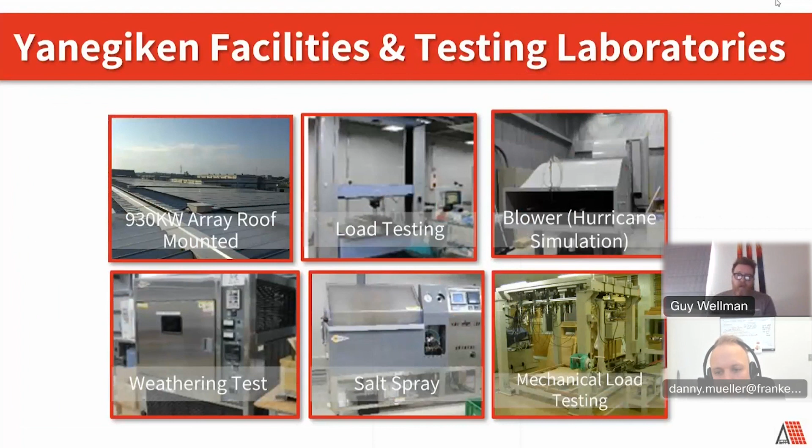We are a second generation family owned company. With Japan, what's going to make us a little bit different than most is the amount of testing that goes into our products. Before we even go to market, before we even go to third-party testing, we are testing. We've always been a big believer that we don't want to have any recalls, and we've never had any, because of the amount of testing we've done before the third party even gets a hold of it and can do their tests.

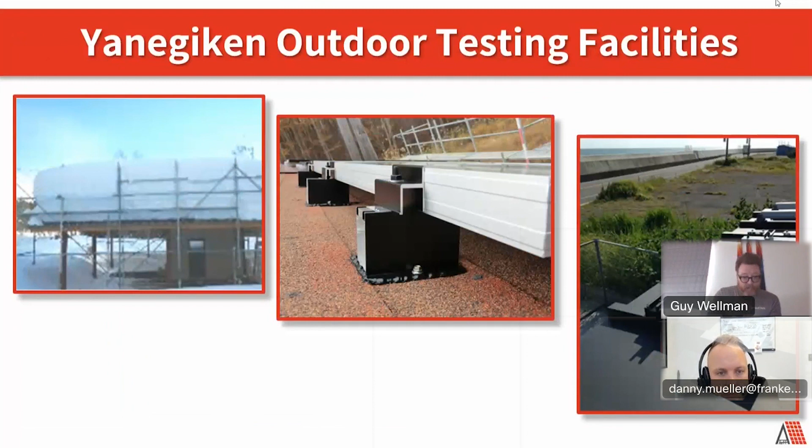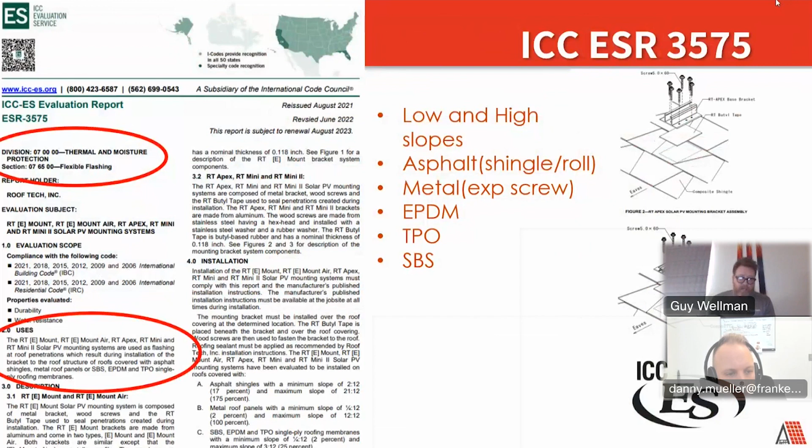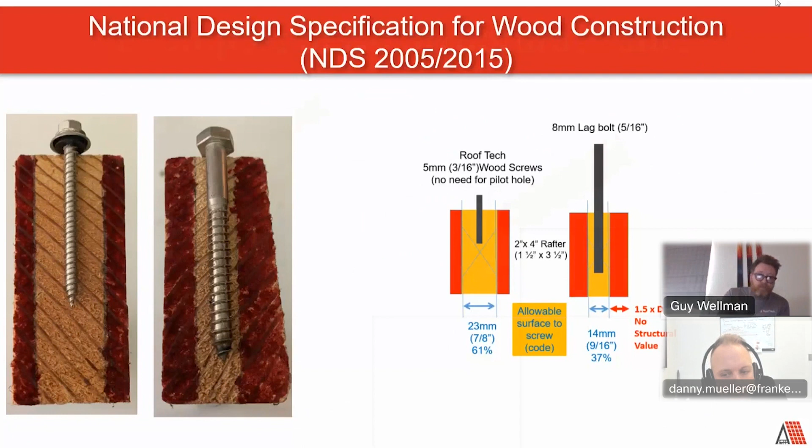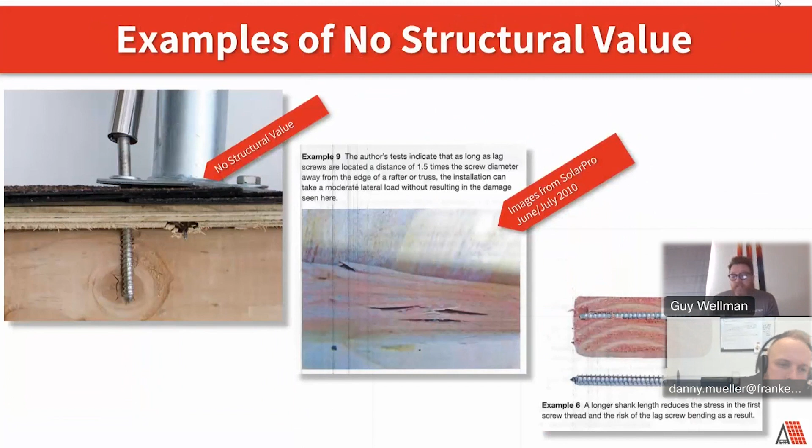Blowing out rafters. This is stuff that, when you go to sell a house and the guy comes in and he wants to look inside and he sees some of these, they're going to be red flags. These are things that you didn't know were issues until you go to sell your home, and now you've got to fix this. Or this is going to result in having leaks with doing a traditional install with solar.

On our railless, I know that a lot of you guys aren't really getting into the railless right now, but just to go through a few of the things why people are moving to the railless. A lot of the bigger national installers across North America are using a railless product now instead of a rail product, for logistics, shipping, damaged rail, bent rail. But some of the flexibility of our product is our clamps, our end clamps, our mid clamps, will handle any module from 30 millimeter to 40 millimeter.

There's leveling right on the top, 1.25 inches. It's really just going to help out the flexibility if you've got to add different modules. You come to a site, you didn't realize that there was a stink pipe, you didn't realize that there was an issue where you have to either move a module or add someplace else. This is just going to help.

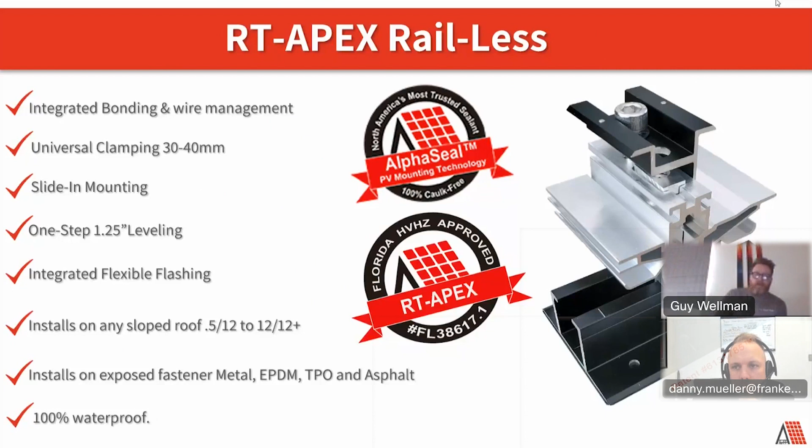And like all of our bases, we're going to be good for any kind of roof material, except no wood shake, no clay tile, and no PVC. The PVC is just because it's not compatible with our flexible flashing. The wood shake is definitely a metal traditional flashing install, and the clay tile can be used, but it's removing clay tiles and putting it on the underlayment. You guys don't really run into much of that up there.

So this quick video of doing a railless, I'm going to skip through it. This is something I can provide you guys if that is an interest down the line. I know we were going to concentrate more on the rail or the mini, but also with the railless, it is going to be different wire management. Everybody's used to tying their inverters or wiring everything up to the rail. And without a rail, there's nothing up there.

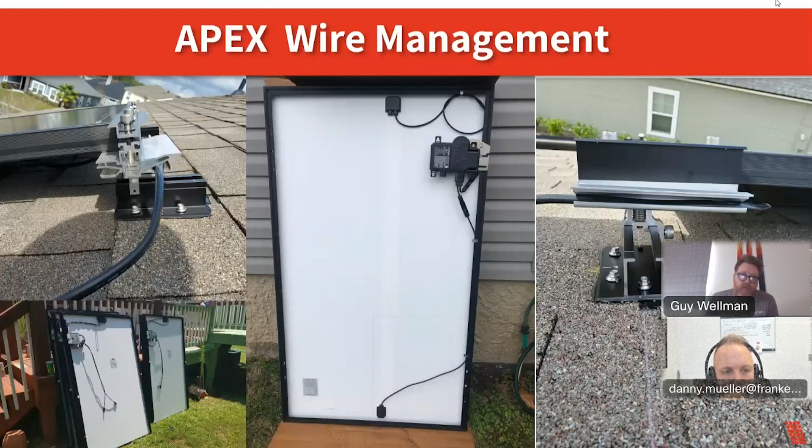So you do all your wire management on the ground, which personally I think is a little safer. You're not doing it on the roof. So you do wire management to the back of the module itself. And then our clamps actually do have troughs throughout to help out with what's left over.

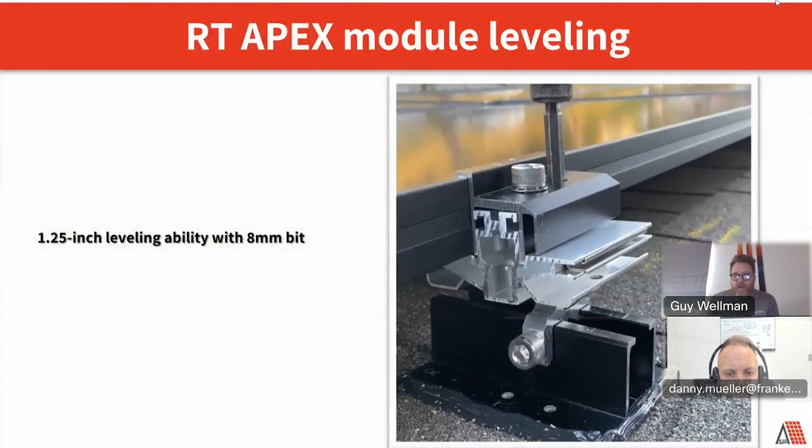Again, some of the leveling, that's going to help out with some of these wonky roofs where they're not quite level. There could be additions added on. There's ridges that run through. It's just a way to at least make that array nice and level from the ground. It looks great, and it's hiding kind of an uneven roof.

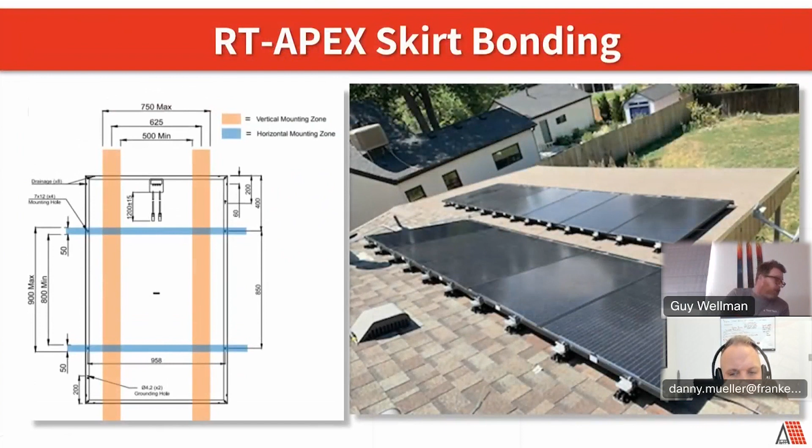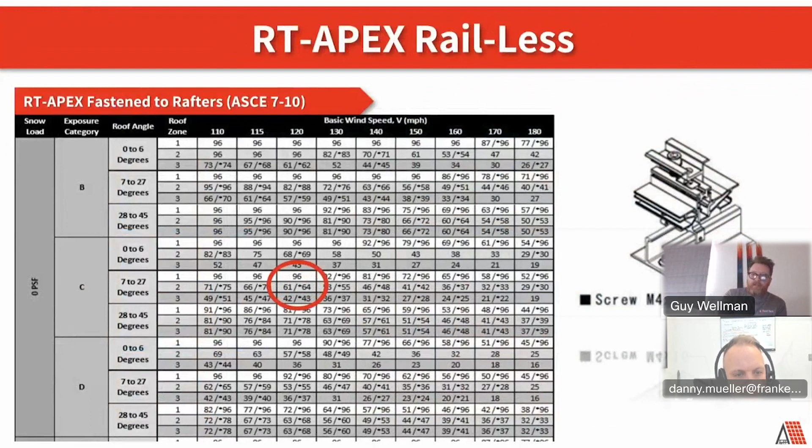We have an SDST screw, which is helping with the strength of our product. It will help expand these max spans for our railless. Helps more in the snow load area, especially in Canada.

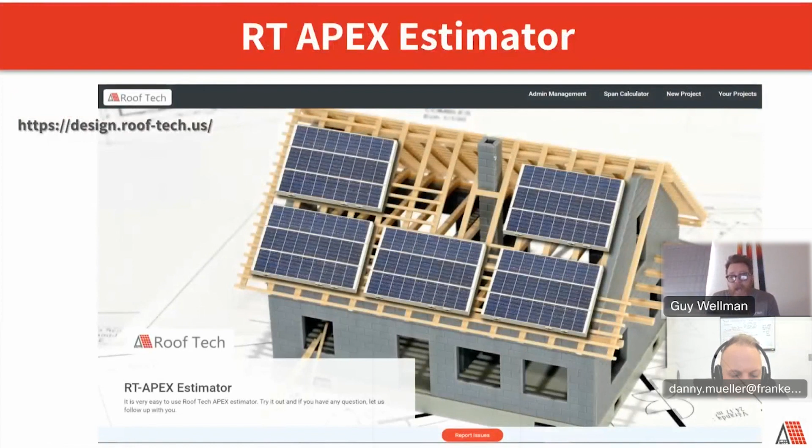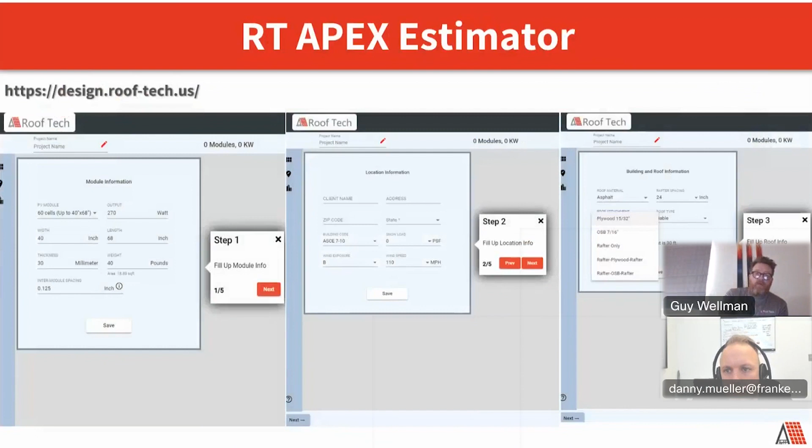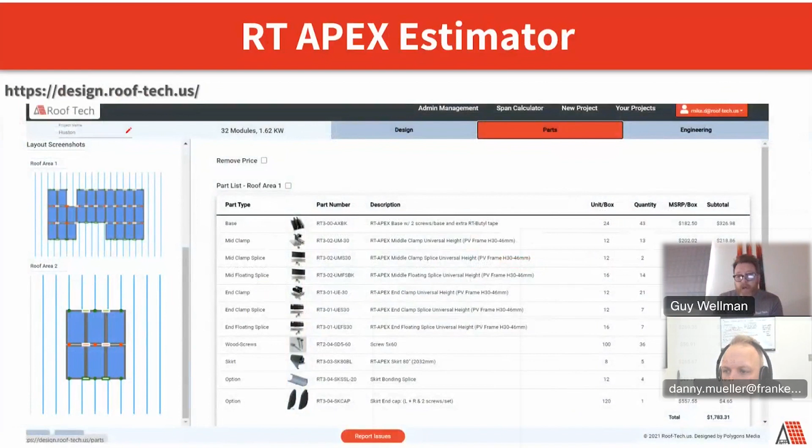And like I said, there is an estimator tool, basically drawing out the array for you and identifying what products are going to be needed for that install. Everything is drop-down menus. It's very easy to use, and it eliminates somebody having to write out their BOM by hand. It's basically putting in your criteria of the roof, pitch of roof, address, where it's located, snow and wind loads, and then it's going to pop out an engineering report, basically stating all the product that you would need from us, along with pictures or diagrams of the array. And then also your engineering report stating what your max spans and everything are going to be.

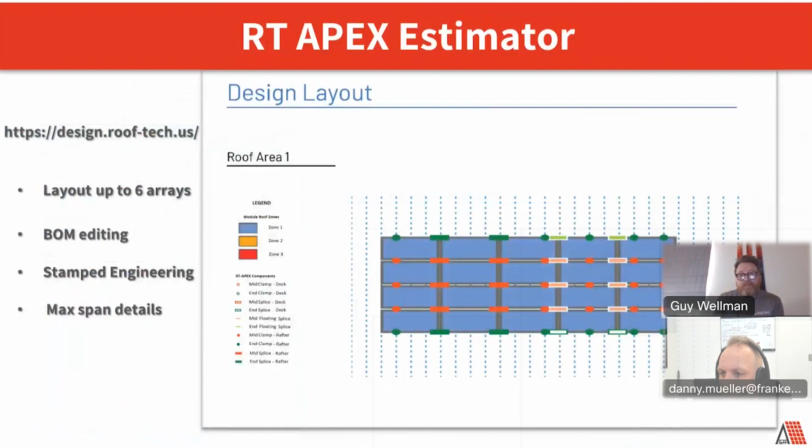Splices, the splices are going to be more for modules that are going to be able to handle that. Not all modules allow for splicing or corner clamping. People, even with our minis, will ask what our max spans are, or where our clamping zones are. Well, that comes from the module manufacturers themselves. It does not come from the racking. So same with the splices, only certain modules are going to allow for that or corner clamping, and that you have to identify through the module manufacturer.

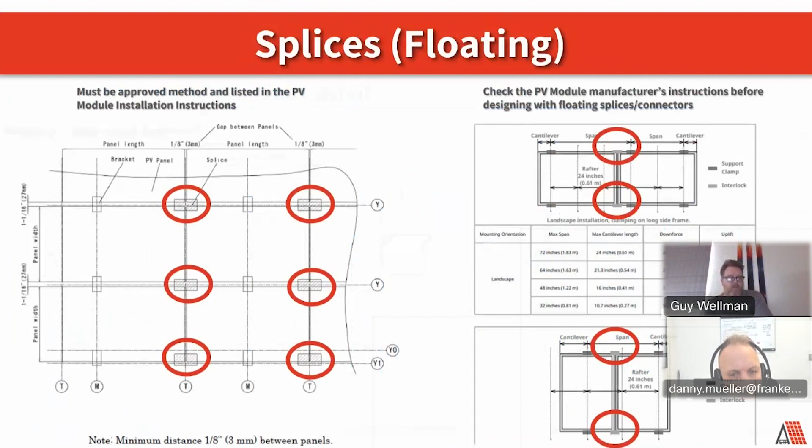So sorry, I kind of went through that a little bit quicker. I know that you guys are a little bit more interested in the minis, or have been using the minis or looking to change to the minis. So with the minis, like our railless bases, there is no pre-drilling, no pre-caulking, no post-caulking. This product is going to be a decking attachment as well as a rafter attachment. A rafter attachment is going to be 2 screws right through the middle of the base. And the decking attachment is going to be 5 screws, the 2 on either side and the top.

So zero caulking, except for on metal roofs, but I will get to that. We ask for a little bit of sealant at the top as a water diversion. This is a watertight seal with our backing. This is not a water diversion. This is not water shedding like traditional flashing. You basically peel the paper off the back of this, place it down on your shingles, put in your screws, and it is immediately watertight.

It talks about some of the temperatures that you can achieve. I need to convert this over to Celsius, but I haven't yet, but you're going to be good down to -40. You're going to be up to 180. Temperature wise, while installing it, it would be about 22 degrees, which doesn't seem like much, but it's not the end of the world. It's just like sealant. When you get into the colder temperatures, you need to keep the bases a little bit warmer. Keep them in the cab before you're going to use them.

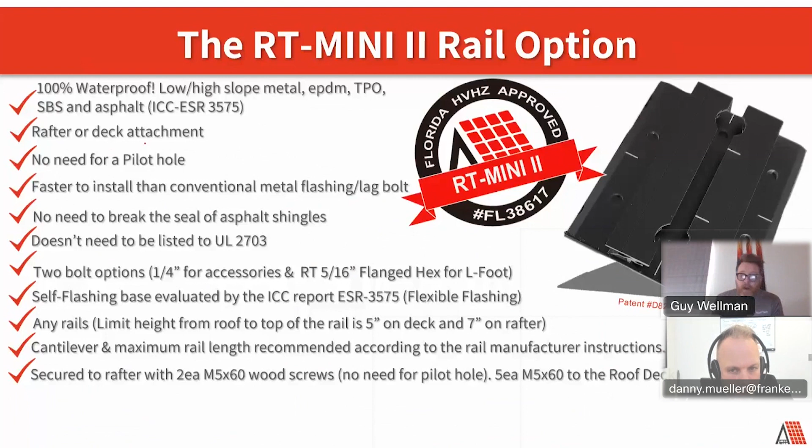So here's the product. This is just a side view here. It does show a little bit of a butyl buildup. That is something that you will see in, I believe, the next slide. Basically, anytime it's going to land on an uneven shingle course, it's not going to be just on a flat surface. You can use butyl, or you could use our extra flexible flashing, or you can also use shingles themselves. I have seen people do cutaways.

So you actually can't cut the main shingle, obviously, but the beauty tabs on shingles you can. And you can use those if you need to build them up. But we do provide extra butyl. But on the mini side, you really get to dictate where this is going to be located. On the railless side, you're kind of pigeonholed to how thick the module is, or the width or the length.

So you're kind of dictated: on the eave row, you'll have a flat surface. Your next bases that you lay down are typically going to be on uneven shingle courses. On the mini here, we don't see a lot of people having to do much butyl work. You get to really design where these bases are going to be located.

Hey, Guy. Yeah, go on. Quick question from Shamor about the temperatures. The question was if it is in Celsius. What were the temperatures again? So you are looking at -40, so -40 is going to be -40 Celsius or Fahrenheit. Correct. And then up to 178 degrees Fahrenheit, which is 81 degrees Celsius. Correct. So we're going to have you covered.

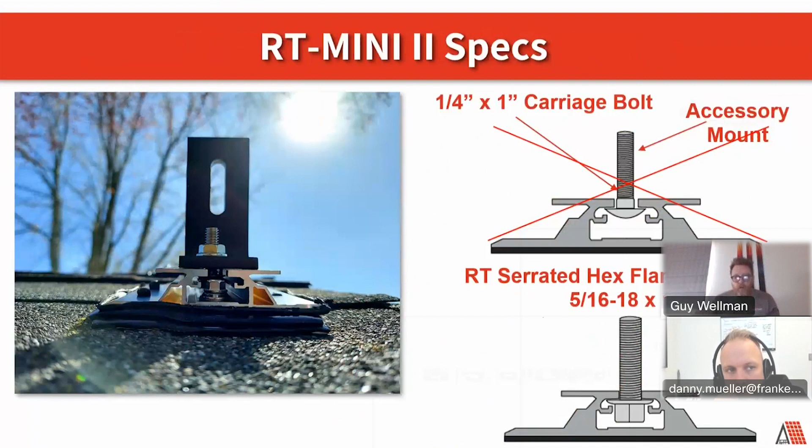It's just making sure you can go well below freezing in what you guys are going to install in those temperatures. But it just needs to be warm when you install it. So that's why I say take a heat gun on the roof. You can do a quick test. You peel the back of it, you stick it on the shingle. Does it stick? It's good to go. If it does not stick, heat it up again. You just need it to stick a little bit, and then you put your screw in, because it just needs to be malleable or rubbery or pliable when you are screwing it into that cavity. Okay, thank you.

The mini does act as a conduit mount as well. There is a self-tapper screw along the side of it. I'm sure people that have used the minis are also using it as a conduit mount. It's not a necessity anymore. I talked to Danny a little bit earlier today about how we do have a new conduit mount coming out by the end of this month, and I will be providing Danny and his team at Franken some samples to hand out and see how everybody likes them.

It's a bit of an overkill when they use the mini for a conduit mount, just because of the testing that we've gone through, and it doesn't need much for a conduit mount. At the same time, it's a little expensive for a conduit mount, so that's why we have designed a new product.

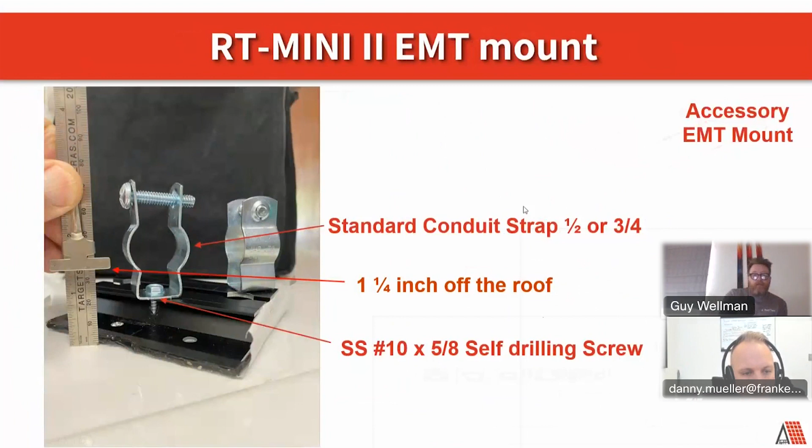And sorry, there was a follow-up question from Shamor. Yeah. The butyl tape, what temperature does it need to be when you install it? So it needs to be above 22 degrees Fahrenheit. Okay. 22 degrees Fahrenheit is -5.5 degrees Celsius. Just looked it up. But again, that's stating that's what temperature it needs to be at. Yeah. So you can achieve that by using the heat gun. Yeah. So that's why I'm saying once it gets lower than that outside, it's not the end game. It's not that you can't install it. You just need to get the flexible butyl on the back of it heated up enough so, once you put the screw through, it pulls into that void, that cavity.

Yeah. Maybe store them somewhere warmer until you use them. Yeah, I actually always tell people to leave them in the truck before you use them. I've got guys that put them in their coat pocket, and then I refer to it as, they're used to using sealant on those cold days. They don't leave their sealant out, it's not just on the garage floor or on the driveway. It's staying as warm as they can keep it, so it's pliable.

So this is just a little bit more of the diagram that I was talking about before. So it's 2 screws for a rafter install, which you're going to achieve longer spans or bigger spans going rafter, and then 5 screws. So there's basically 2 on either side here and 1 in the top. When you're doing a rafter install on the left or on the right here, where you've got the 2 screws, you just have to make sure your bolt is put in.

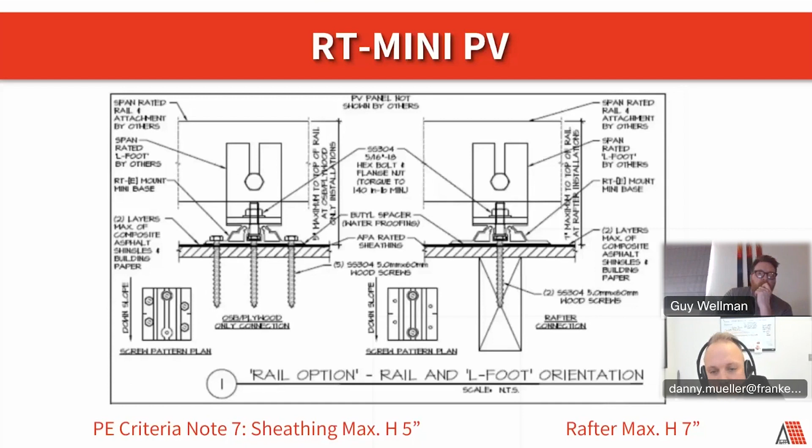This is what I was talking about. If you guys were hitting rafters, you basically have 2 or 3 options. You've got decking only, you've got rafter, you've got decking-rafter-decking, and then also what we call a hybrid attachment.

Basically you put in that first screw, and in the diagram it's not showing that there are 2 rafters next to each other - it's either side, you can just cover up one. It's showing that if you hit a rafter on the side, it's basically the same as if we hit it right down the middle, and we've done the testing for that as well.

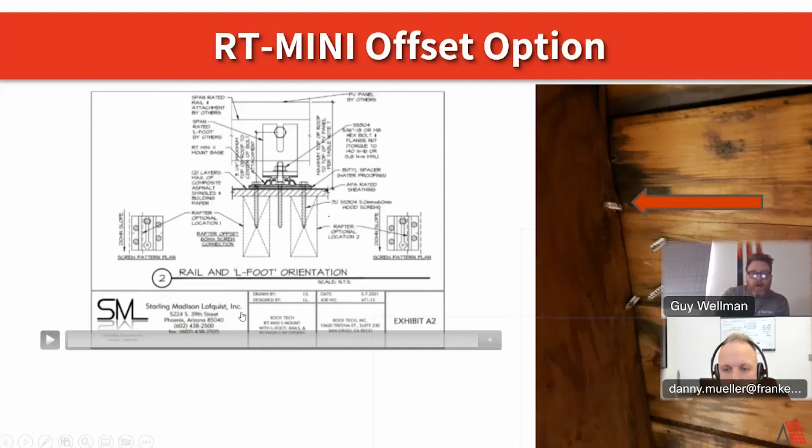Adjustability too - people have asked us in the past, when are we going to get an integrated L foot, when is it all going to be one piece? I understand it takes a little bit of time to put your L foot and the bolt together compared to if it was just an integrated L foot.

Actually, we will probably never do this. One of the reasons is because there is some play, there's flexibility here from almost bolt to bolt.

You've got about 2 inches of play to be able to bring that L foot to your rail. So if the rail is damaged, if it's mismeasured and put down improperly, you're not bending the rail to meet your L foot anymore - you're bringing your L foot to the rail.

By bending this or trying to force it to an integrated L foot, you're really putting undue stress on that roof. Over time, over the course of a year, maybe 2 years, you're going to see loose bolts because it was putting so much stress on it.

And then with the expansion and contraction, wind - you rattle those nuts and bolts around, things are going to be loose. If you look at anybody's manual, it'll say you should be going back after year 1 to tighten up nuts and bolts. I know most people don't do that, but that's what they state.

So with us being able to move to that rail, that's going to at least alleviate some of that pressure and you'll probably be less likely to have loose nuts and bolts when you go back, if you went back.

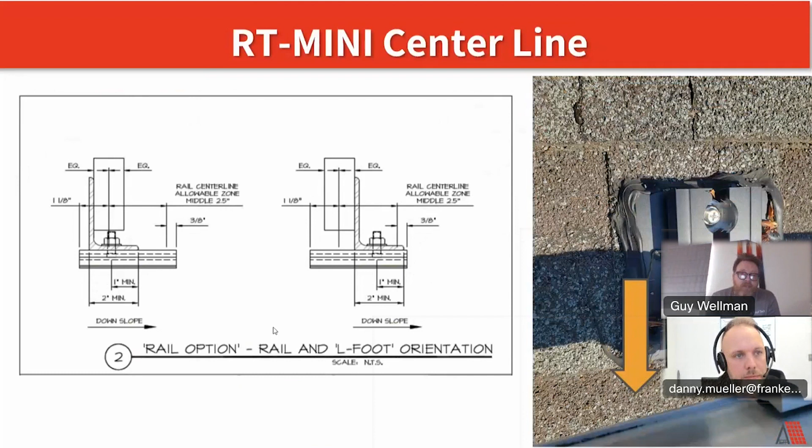One of the benefits of your product is that it's agnostic, right? So if you have an integrated L foot, maybe it doesn't work exactly with some of the racking, some of the rail.

For the longest time we weren't in IronRidge's manual, and a couple other manuals, because they just didn't think this was a viable option. We are now in the manuals.

But every one of these companies are going to have just a standard L foot. Of course, they're also going to produce L feet specific to their traditional flashing, but at the same time they're always going to carry just a generic L foot. So really it's a way for you guys to keep doing what you're doing, keeping your L foot, keeping your rail, and just having a quicker install process because of the flashing - no longer needing to find the rafters, no more pilot holes, no more pre-caulking, no more post-caulking. It's just going to be a lot easier.

Schletter has even stopped producing any sort of flashing themselves because our product is in their drawings. So it's something we've worked with them to integrate into all their drawings and pre-stamped drawings for building permits, etc. So yeah, they're very happy with the product as well.

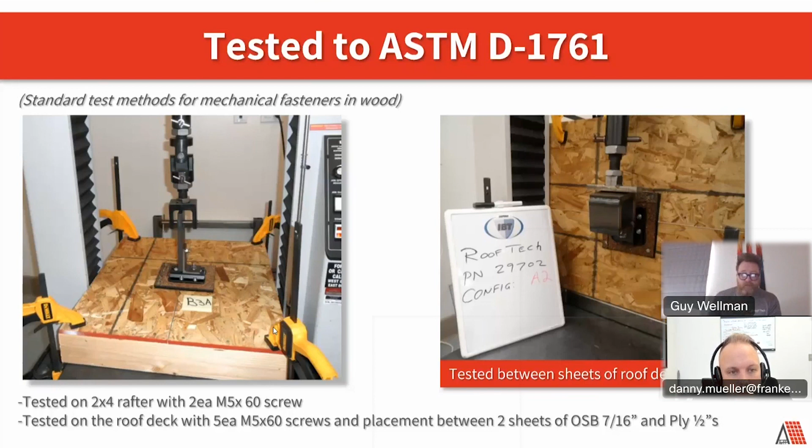Our max span calculator that we have online is something that can be worked on the fly. Let's say you were going rafter to rafter and then missed a rafter - you can calculate it right away on your phone to figure out what your next span should be. If they were up on a roof and didn't have this already, they can work it on their phone. But more times than not, your installers are going to know what their max spans are before they even get there.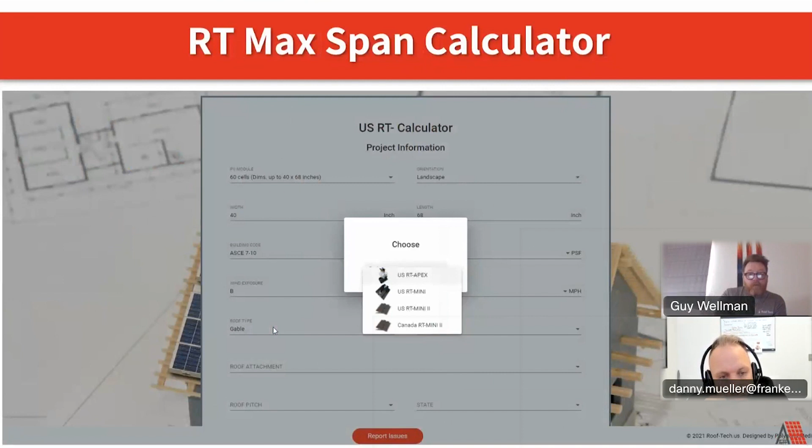Now you run into people stating, hey, I come and fix jobs all the time where people are putting butyl on the back of an L foot and attaching it to the roof. Well, it's not our butyl - our butyl is specific to ours, it is proprietary to us. It's our patented butyl, that's why we changed it to something like an AlphaSeal technology.

It's not meaning that outside of the 45 we can't do it, it just needs separate engineering. We didn't do any kind of testing or engineering past 45. So we have been installed on those very steep church roofs, and it's been fine - it just needs a third-party engineer coming in and okaying it.

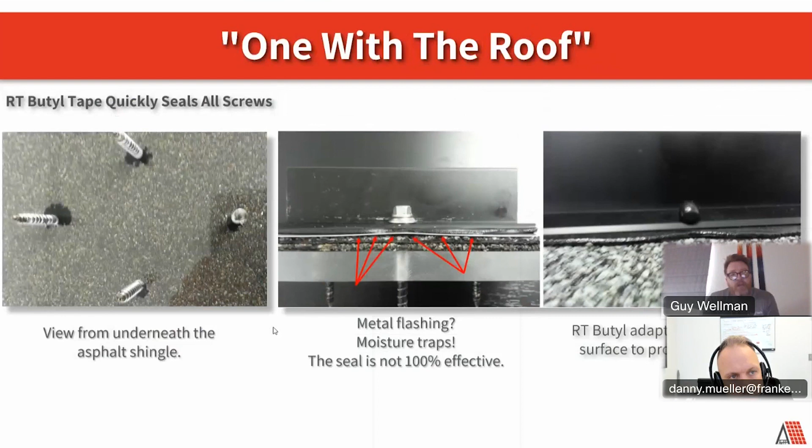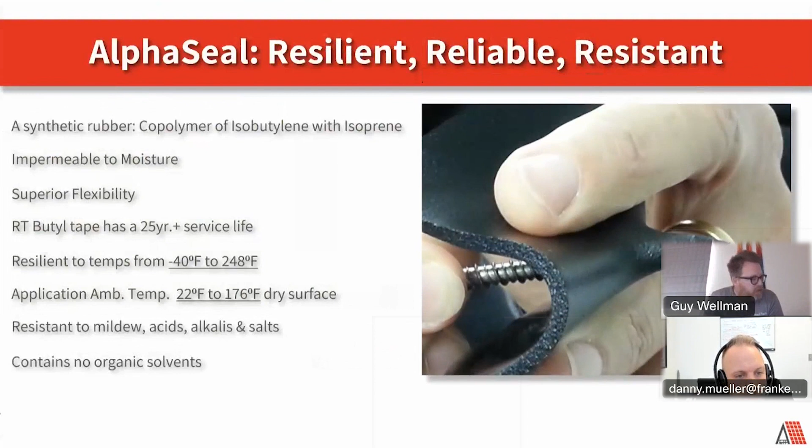So here are these temperatures that I was talking about, and I can send these out, but for whatever reason I just have not converted it to Celsius, and I need to do that. But this is what is sealing everything up.

This is what is making it waterproof. And like I said, we've done the fully submerged tests. We've also done at shows where we install this in water. We fill a piece of a roof with water, install it, then back out the screw completely, and there you can see a drip.

You put it back in, and it seals it right back up. So the temperatures are, like I said, -40 to 248, not 176, but the app temperature, the temperature it needs to be installed at, is 22 degrees to 176. So the 22 degrees, that's about -5.5.

I've been on jobs where it's well below freezing and we're installing it, but it's a sunny day, it's a nice day, the roofs are dry, and it just takes heating up the back of our bases a little bit, just making them warm enough to install. Then once it's installed, it can instantly get cold again. It just needs to be pliable.

Like you should see the screw poking through the butyl right now. It needs to be like that just for when it installs, as it enters the sheathing or whatever surface structure you're installing on.

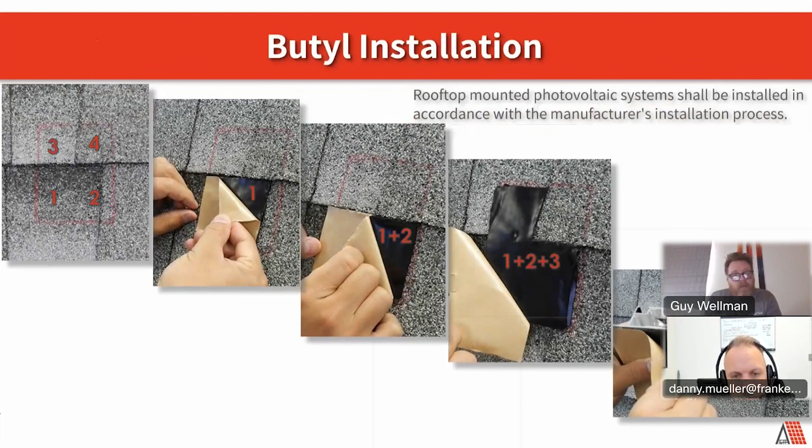And again, like I was mentioning, you can cut away butyl tabs. You cannot cut away, obviously, the main shingle, but the butyl tabs that are on that main shingle, you can. You can also use shingles as a viable option if you did not have butyl.

There's a quick question from Andrew: have you guys done any testing with the lateral loading of the RT Mini, hypothetically if it were used as a safety anchoring position? So we have, we actually talked about it a little bit last year or maybe the year before, and it's just the loads that are needed for a fall. It cannot be an option, because we had guys stating before, 'We're using your minis to attach our harnesses and our fall gear.'

And so we thought, oh man, that'd be pretty interesting, maybe this would be a viable option. And we came back and it was like, yeah, there's no way. The amount of force that is needed - not saying it wouldn't work, it's just saying the amount of force that is needed to sign off on it - we're nowhere near that.

I'm sure from a liability standpoint there would be issues. I mean, it was a great option, to put something up like that and to be able to hook onto it nice and easy. We got all excited as soon as we heard this was going to be a possibility, and then our engineer got back to us and said, absolutely not.

And then Jamor had another question about how dry is dry - are we expecting perfectly dry, or is a little dampness okay? So yes, a little dampness is okay, but obviously you don't want to trap any kind of moisture inside of our flashing.

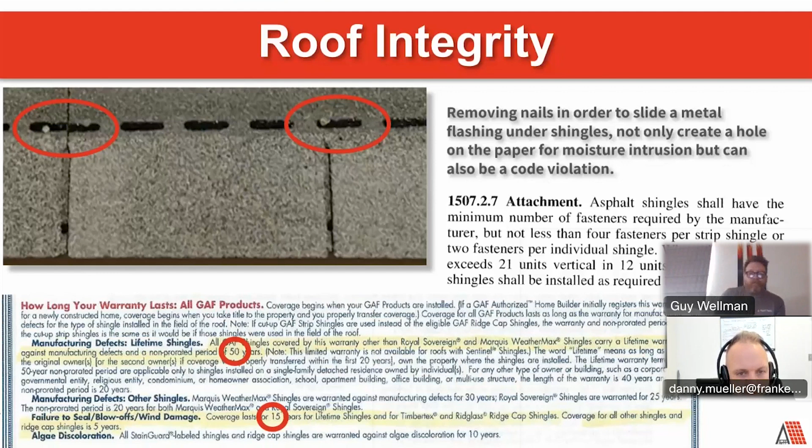We actually used to require 3 sides of sealant for UV protectant, and it was not for anything other than UV protectant. That is now just an option, so there is 0 sealant required.

So with 50 million penetrations worldwide with 0 leaks in North America and worldwide, it is not a new product. People will kind of scoff at those numbers, but obviously it's every penetration. I would like the numbers to be even higher, I wish we had more holes.

It was just to show that if you are installing this product properly, and that will come with training and advice from us. It's more so the training is going to be for the railless side. The minis virtually require no training. I can show somebody how to install a mini in a matter of minutes and have confidence that they are not going to cause a leak or any issues to that install.

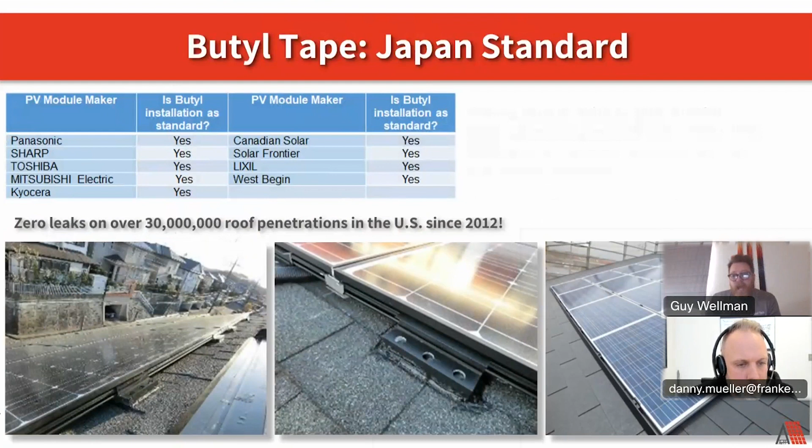We tell people, if you put down a mini and you put it down in the wrong place, don't move it, leave it there. I would leave it there. It's already sealed up, and the array more times than not is going to cover that missed mini.

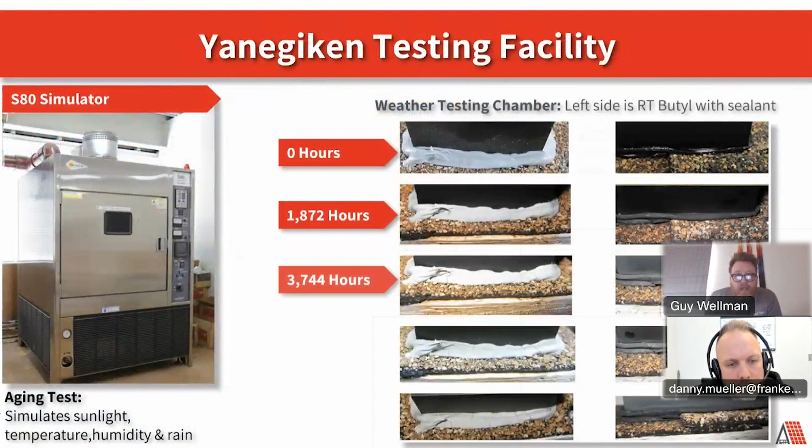More testing. This was our carbon arc test, basically simulating multiple years of humidity, heat, rain, everything. You can see what it does to just standard caulk - it starts off pliable. Ours, on the other hand, will be pliable throughout that whole process.

I've gone to jobs where they're doing a re-roof, and our second generation Apex or second generation railless was installed. We have to pull up all the bases because they think they're going to reuse them - there's a stipulation, that was one of the frequently asked questions, can I use these bases again? You can use these again, up to 2 times. So you can use it the first time originally, and then you can do it again for a retrofit.

The problem is getting the butyl off the back of the bases - it's going to be very difficult. I've had people wanting to save money so much that they stick all their bases, whether it's minis or railless, into the freezer to get the butyl as hard as possible so they can chip away and then put a new piece of butyl onto the back. It sometimes doesn't make sense, but it's just to show that it's still pliable years down the line. It's still rubbery, still doing its job.

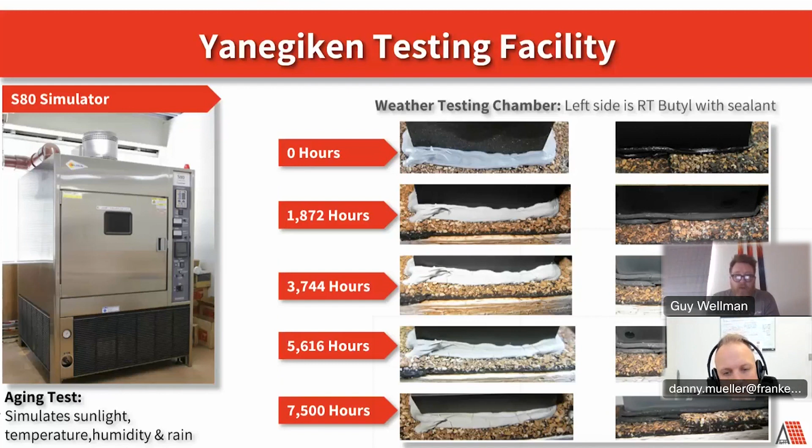Some more pictures here, basically just showing when you are pulling this up or using butyl. You can see on that far right picture the butyl on the inside, and on the sealant, it's only got a couple spots where it's still rubbery, still pliable, still doing its job. Other times it's just cracked up - it's really not doing anything anymore, and that's when you're going to risk a leak.

You'll see that even with other products out there that require a lot of sealant, whether it's sealant underneath - the sealant underneath is probably doing the most of the work. The sealant on the bases is really going to crack up over time, and it's really not going to be providing any value, but hopefully it's going to save what's underneath. It's just that sealant is not a good option for this, and really the butyl, or our flexible seal, is something we have confidence in. That's why we offer our 25-year warranty.

We have outlived our 25-year warranty. We've talked about making it a longer warranty, but really it's kind of a moot point because roofs aren't going to last that long anyways.

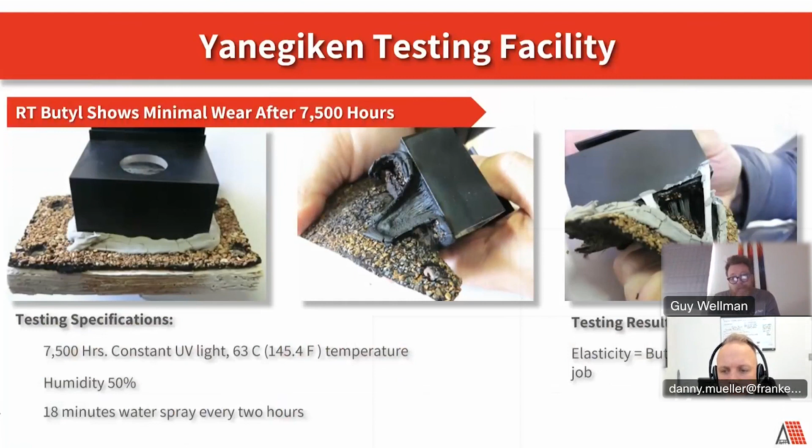There was another question, Guy. So if you reuse the RT Mini, can you just use a new butyl strip? I guess the answer to that is yes, technically. You can reuse it, but the back of it, you do need to clean off the old butyl. We do have extra butyl pads that you can order and put right on the back of them, so you could use it again. It's just once they start getting into trying to remove that, they're going to see that it is a little harder than what they think. So it's an option, and I always put it out there for people, but I have yet to see anybody do it for bigger arrays.

If you're only dealing with a handful of bases and it was a DIYer that did it themselves, then yeah, I have seen them remove the butyl, put on new butyl, and reinstall that same array onto the new roof. But we're selling these things for well below $8 each. I don't think it would be worth the time it takes to get all that sticky stuff off. You have to buy new butyl tape too, which is going to cost a couple of dollars. Probably best to just buy a new RT Mini. People want to have that option in their head of like, oh, I can reuse these, okay great. But when it comes down to them actually trying it, they're like, you know what, I'm just going to buy new minis. I think it's probably the best use of your time. Your time is not free either, right?

What about metal roofs that are... can you hear me? Yes, we can. What about metal roofs? I see the metal roof here in your picture with the profiles, looks like maybe 8 inches apart, or maybe six. What about the roofs that are corrugated and literally look just like a wave, without any flat spots at all?

Yeah, so that's not going to be a good fit. So when I say that metal roofs are good, it's kind of... you need a flat surface at the end of the day. It's like standing seam, we're not good for standing seam either. You should not penetrate a standing seam. They've got tile hooks or clamps for those, and we'll tell you that. For these too, yes, we can be installed on certain metal roofs, and we have that capability. But once you send a picture or you ask us, we'll steer you in the right direction.

We're going to say no, it's not a good fit. Yeah, you can contact us too. We've got a large variety of different products that may work. Schletter has a bunch of products. Solar Connections has a bunch of products that we work with. So we will find the right product for you for specific metal roofs.

If there is a way to connect the RT Mini, I think generally that is in most cases the best solution if it does work. But in some cases, it's just not the best solution. Yeah. Well, I'll tell people definitely I'm not going to try to be everything to everybody, and people once they start using the minis will start wanting to use us for everything, and then I'll tell them there's other products that are made for this.

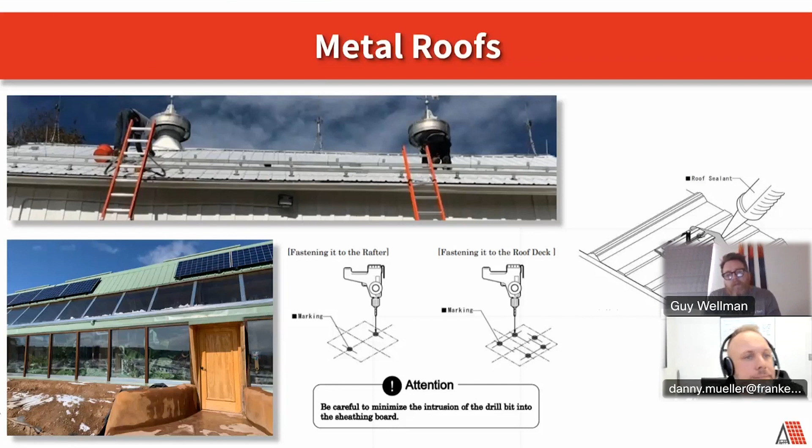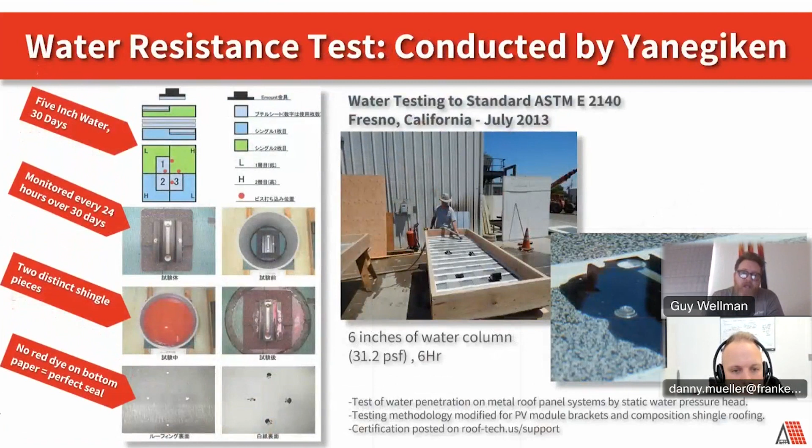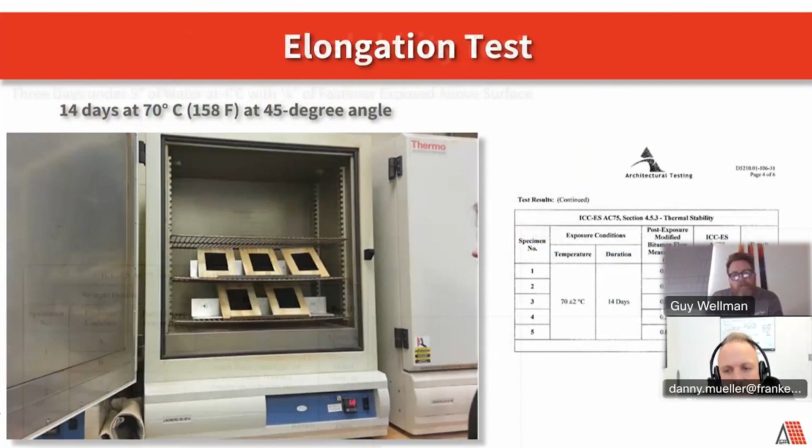Hey, Guy, quick follow-up questions from Andrew. When he went to the metal roof, he says that he's had a hard time with thicker metal, so pre-drilling definitely was required. He was wondering if you guys are working at all on a drill head for metal roofs, a screw that has a drill head. No, because the screws that we have, they're wood screws.

And even if you were to have a drill head, again, we don't want that butyl to be pushed aside. Even when you're doing a pre-drilling and pre-caulking, in the in-between time that butyl will kind of fall back into place. So we haven't really talked about that. The only other option we have is longer screws, but that doesn't help with the thicker metal. So the thicker metal is going to be more on that pre-drilling and not so much the pre-tapping. But yeah, we have not talked about a drill head screw.

The screws for metal roofing come in several different sizes, complete with the rubber gasket on the head, like you had shown in one of your previous drawings. Those would work fine for penetrating any roof as well, because they're meant for metal. Yeah, that's what I've used on metal roofs many times.

Unfortunately, with our products, it does require our screws, our bolts to keep intact the warranty. Don't get me wrong, I've seen guys have to make things work, but unfortunately, it would need to be our screws for the warranty to stay intact.

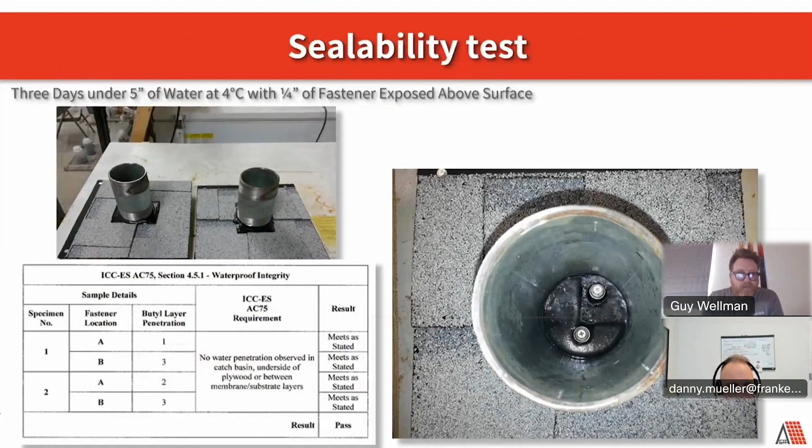More on, again, so this was a project that we did for some of the shows. We used to put a fish in there and show it off. We did get in a little bit of trouble from PETA about the goldfish, which was kind of amazing because it seems like the fish at the fair have a much worse life. But again, we still do the test. We don't do the fish.

But it basically is just to show you that we can install this in water. So a little bit of moisture, again, is okay. It's not preferred. We want to get it as dry as possible, but these are installed while the water is in there. So it's to show that as soon as that screw goes through, it makes an immediate seal and it makes it watertight, not a water diversion or a water shedding.

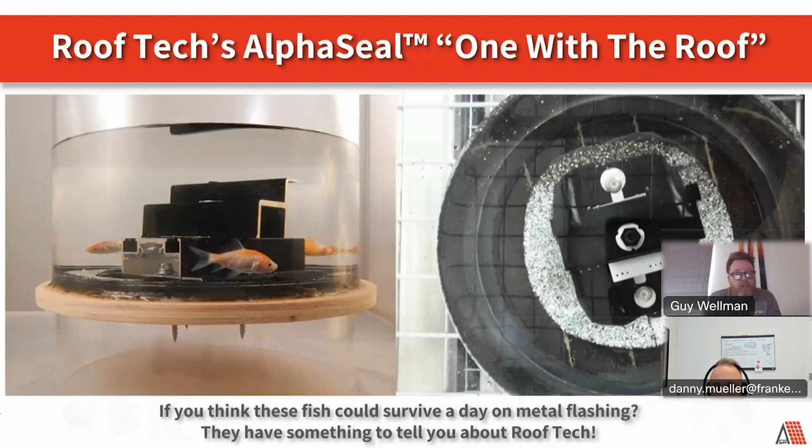Chris had a quick question. He was asking about trapezoidal metal roofs. I guess for trapezoidal metal roofs, and correct me if I'm wrong, Guy, it all depends on how big the surface area is between the trapezoids. If it's big enough to fit the RT Mini, then it should work. If it's not, then there's other solutions for that.

Well, even on that option, so if it does not fit in the valley or it just barely fits, what we say is to go on top of one of the sides and use some butyl on the other side. So there are options for that. There's some room to play left and right. You'll be able to adjust it even if it doesn't fit exactly perfect on the bottom flat. You can go over to that next hump and actually fill the cavity or that valley with butyl, and it would be half on a flat, half on the butyl, and you can still install.

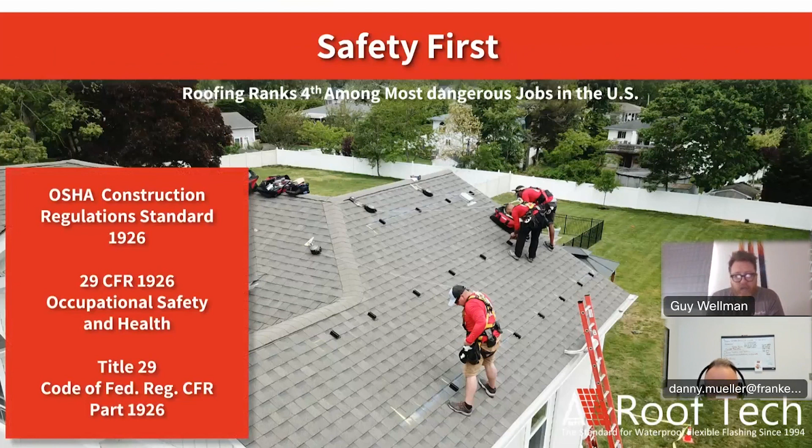So some of the additional things that we offer, I talked about the estimator for our railless product. I can do training on that at any time to teach you guys how to use that. Our estimator tool for our max spans, I can do training on that. The railless product itself, this is something where we worked out with Danny and his crew that we can offer you guys up. If you guys are interested in looking into a railless option, we'll offer up a free job.

I mean, obviously you buy a job, you get a job, but what I'll do is come and do training with your crew on that roof, hopefully for both the jobs, do them back to back. And what I tell people is, once you've gotten through 2 jobs, you're going to be moving just as quickly as you were before, if not faster, using a railless. So that's where the on-the-job training comes.

I can do trainings with you guys virtually anytime over the internet, with the mini side. And really, I always tell people, make sure that your installers have my card, my contact information. They can call me at any time to answer any questions regarding our product or regarding anything that they're going to run into. I've got the guys behind me to support me that I can get this answered while they're on the roof.

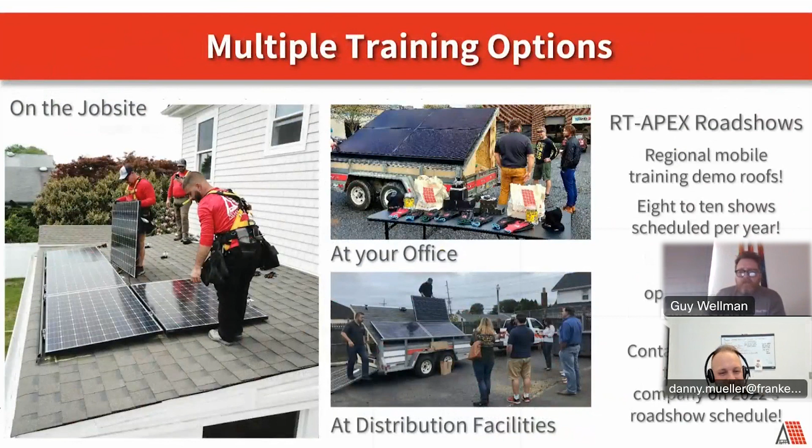Again, more just on the training. We talked about doing some road shows up in Canada. I've got to build a roof to actually get around to you guys. It is unfortunate in Canada that it doesn't seem like there's a lot of straight shots road-wise. It looks like, oh, this should only take me 5-6 hours to drive from this town to this town, and it takes me like 17 hours for some reason. So that will be coming though, to where I can do some training like that.

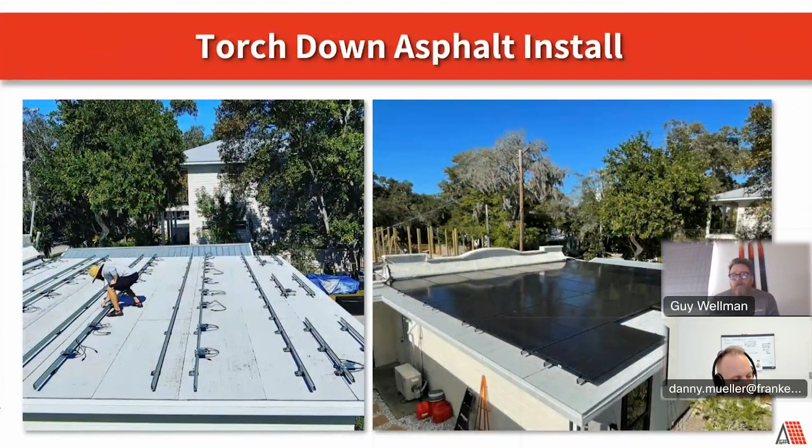Some of these next slides are basically just showing, like I said, we do any type of roof except for wood shake, clay tile, and PVC. So we're doing torch down, we're doing EPDM, we're doing rolled asphalt, TPO, we're doing all of this. But at the same time, again, it's like me saying that we do metal roofs. You can go to a TPO install and it's spongy because underneath the TPO, before you get to the structure, is quite a bit of insulation.

And then again, I would be saying you should not install with us. There's other products out there to install properly through that insulation. You got people that are wanting to cut holes, cut through the insulation, put our mini down, put a stanchion on that, backfill it with Chemlink or whatever they're going to use to seal it up. And I just tell people, there's products for this. You should use this. We're not going to be everything to everybody, but in certain cases, I like to call it the Goldilocks effect, it just needs to be just right.

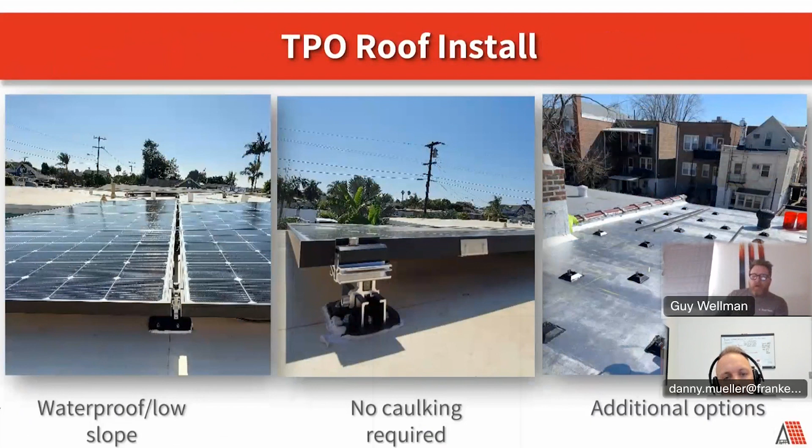I just did a TPO install last week where there was virtually no insulation in between the TPO and the decking. So we were good to go. But that's not the case most of the time. Most of the time it's a spongy roof, and I tell people it's not a good fit. And I think I've mentioned we are the only products out there that are going to be able to install from a 0 pitch up to that 45.

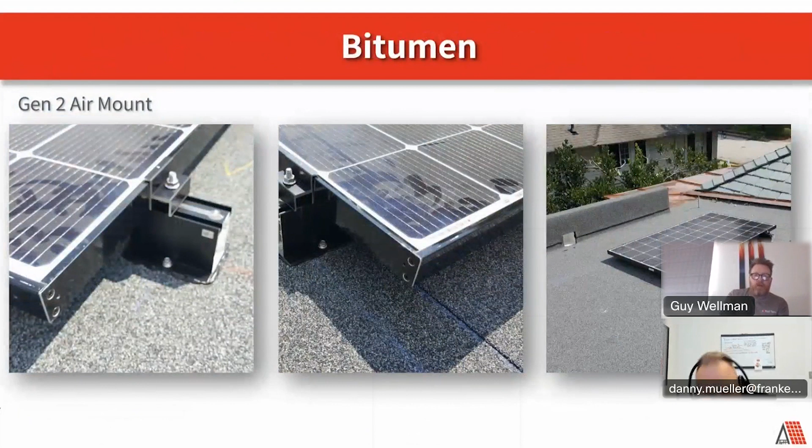So again, the bitumen, any kind of membrane, we're going to be able to install on. But again, it's case by case. I always like people, if it's something that they haven't run into before or are unsure of, to reach out to me, ask me questions, and I will be the first one to tell them, hey, this is probably not a good fit.

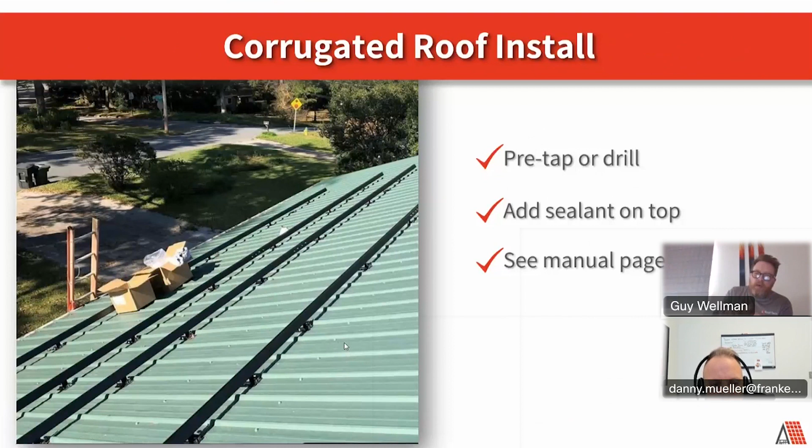I've had jobs where I've done a free install and I'm on site with the guy. I ask him right away, did you measure the module or are you going off the spec sheet? He said, I measured the module. And I said, well, why don't we just double check? And he gets kind of mad at me. This isn't my first rodeo. I've been doing this for years. Who are you to tell me? And I said, that's fine. Okay, you already did it. No problem. So we laid all the bases.

There were, I think, 57 modules. So there was a ton of bases. And when I went to lay that first module down, it did not even reach the next base. And I asked him, what's going on? Is this in the wrong orientation? He goes, I thought it was 49 inches wide and it was 41 inches wide. So we had all these bases where that first one is 8 inches off, the next one is 16 inches off, and so on.

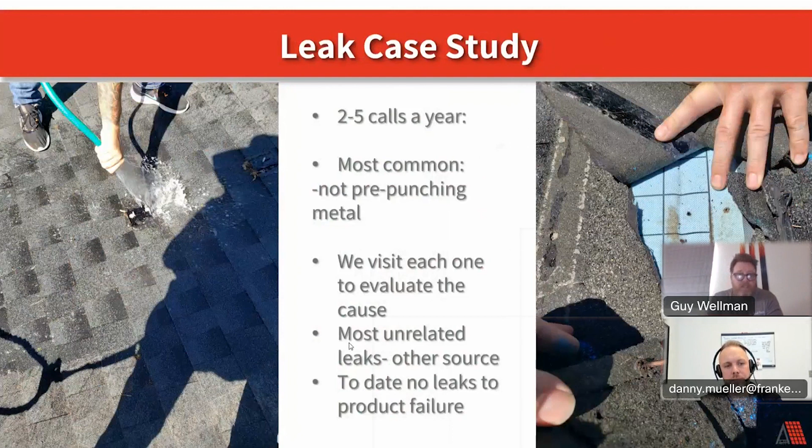And luckily I had more bases and we laid down all new bases. Underneath the array there were quite a few empty bases, but they've had 0 leaks on this property. And it was better than pulling up each one of those and then flashing or sealing with sealant. So again, we just say to leave it. I would not move it.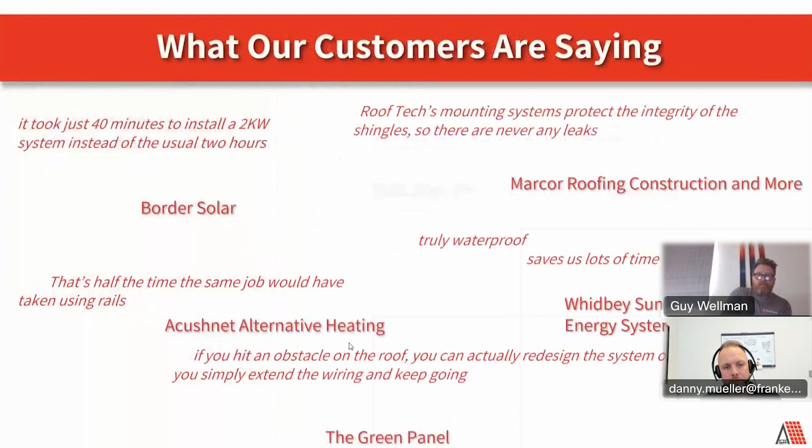Well, that's kind of getting to the end, guys. If you have any questions, let me... Yeah, looks like we've already had a bunch of questions as we went, but now would be a good time if you have additional ones. Be a great time to ask those.

Can you hear me? Yes. Yes.

So this webinar, I don't see Franken Solar anywhere. Are you guys working hand in hand with each other? How does this work?

Absolutely. We're one of the distributors, I think there's a few distributors out there, but yeah, we're definitely one of them. We've worked with Roof Tech since around 2018, 2019, not sure exactly when we started, but we've sold well north of 100,000 of these units in the last few years. Quite popular. I'd say 95% of all the residential flush mount we sell these days is with RT Minis.

There's a couple of customers still using traditional flashings, but anyone who's ever switched away from the traditional flashing and hanger bolt solution over to Roof Tech has loved it and stayed with Roof Tech. I don't think anyone has gone back. So yeah, we definitely distribute this product. You can find it on our price list. If you don't currently get our price list, reach out and we'll hook you up.